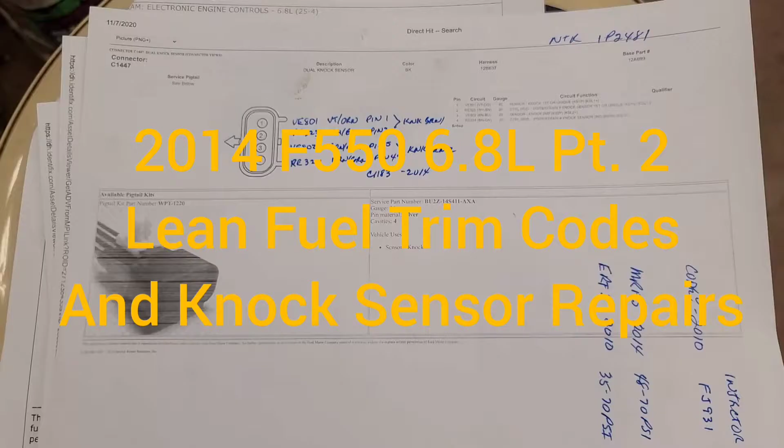So we're back working on this 2014 F550, and here was my plan. I attempted to locate this connector here, this WPT1220. It's available from Ford, but it's 2 to 3 weeks away, so I've ordered it from an alternate supplier, in this case Rock Auto, and it's going to be here quicker, and it's a few dollars cheaper. The price is not the issue, it's the time.

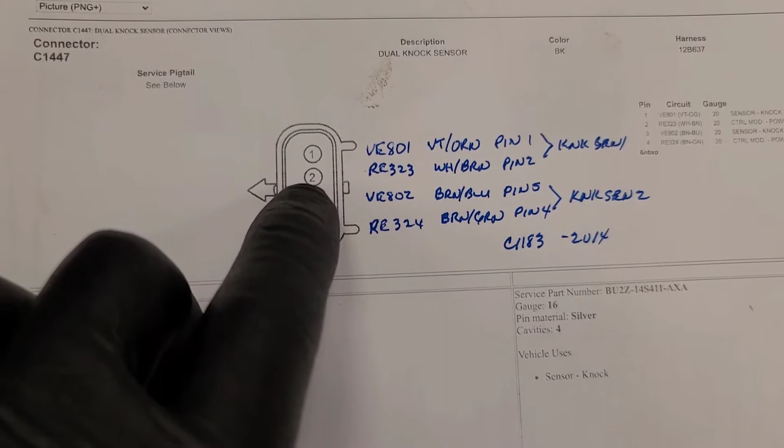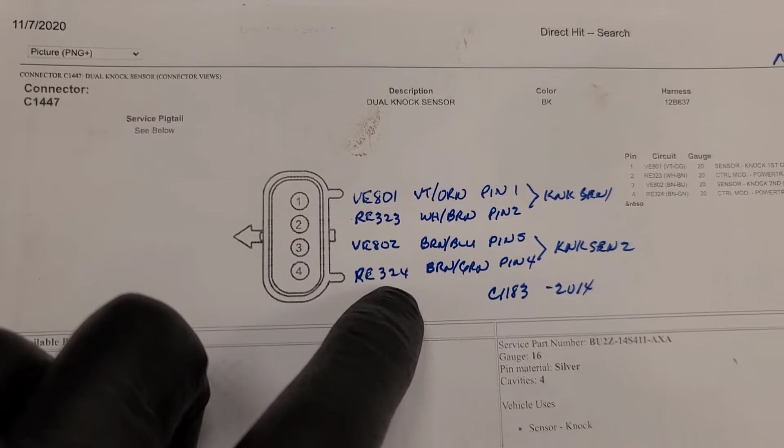But in the meantime, I'm going to put 4 male terminals on the wires and insert them into the appropriate pins. These are the pin numbers. 1 and 2 come from knock sensor 1, and 3 and 4 go to knock sensor 2. And I imagine they're polarity sensitive, but I'm not 100% certain because the knock sensor produces an AC signal, so it may not be polarity sensitive, but we're going to try to maintain the polarity.

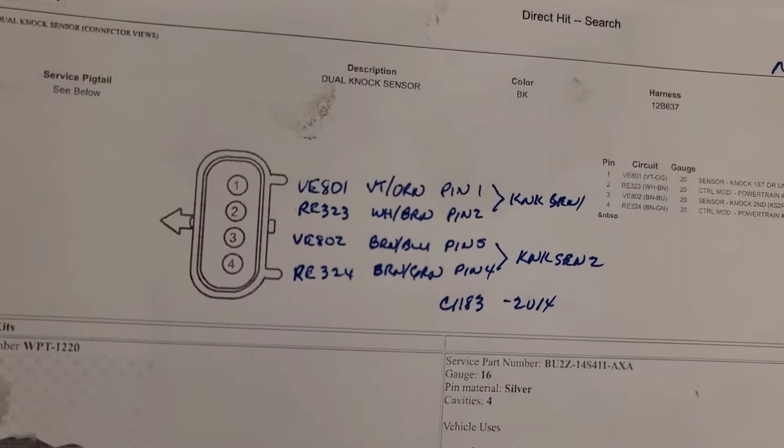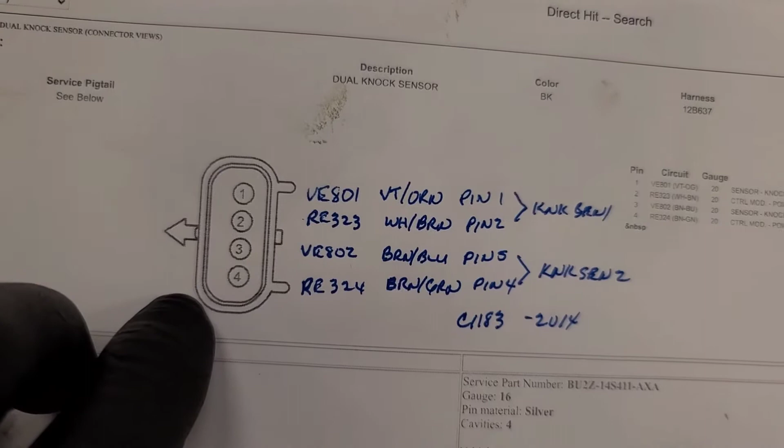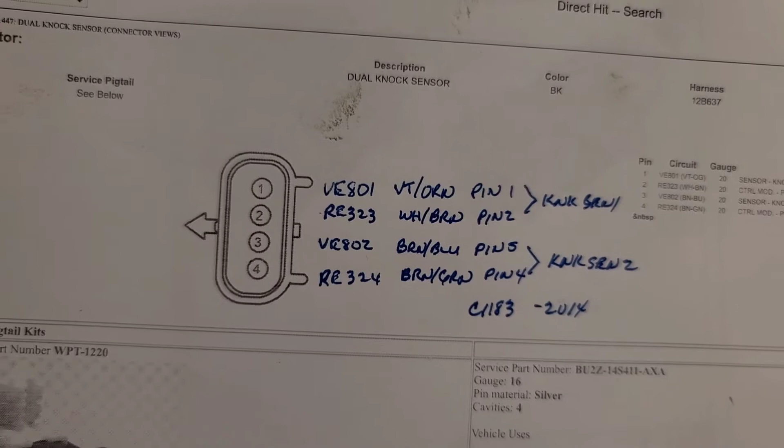We're using these 4 pins on the 2014 harness, and adapting it to these 4 pins on the 2010 harness. We're going to just make a temporary repair for now and tie up the wires so that they don't fall out, and then when I get the connector I'll make a more permanent repair. And then we're going to address the reason why it's running lean on both banks.

So that gives you an idea where that connector is. You can see the wires going down behind the intake manifold. I had to work by feel to put the 4 individual wires into the 4 female terminals in the connector on the knock sensor, the dual knock sensor.

Now I'm going to take this fuel rail line off. Notice the sketchy haywire and the hose clamp on there. I suspect there's no garter spring inside that quick connector, and that's why somebody haywired it on like that. But I have to take that off to put a fuel pressure gauge T in there. So we're going to do that and see what's going on.

So this is the fitting that needs to be put in series in the line. I took the haywire off and this line just pulled straight off. The garter spring is in there, but it wasn't holding at all, so I'm not sure what's going on with that, but we'll put some dielectric grease on there and see if this holds. I noticed this rib isn't very tall on the existing fuel rail, so I don't know, we'll see.

So I had to put a couple of tie wraps on that pressure fitting because the flare on the end of that pipe is too small for that garter spring to grab it. I don't know why, but if we end up doing injectors on this, I'll deal with that at that time. So I got the fuel pressure gauge installed. We're gonna check it for leaks and then fire it up, and got the scanner on. We'll have a look at the fuel trims and see what the fuel pressure is doing.

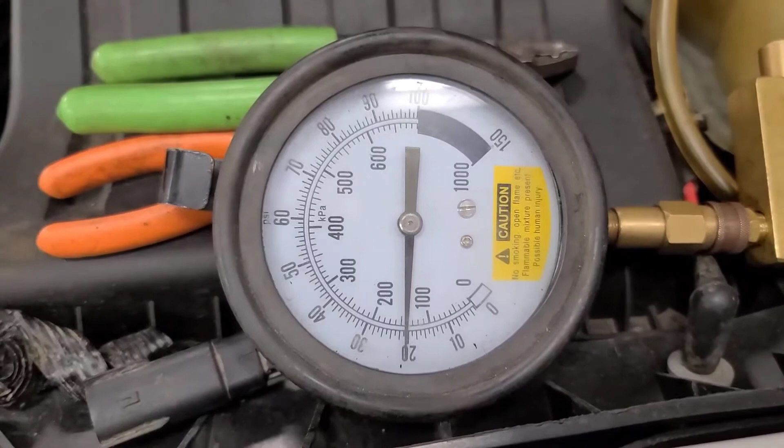Well, that would probably account for the running lean condition. No matter what spec I use for the 2010 or 2014, 20 pounds wasn't the spec. It's 30 or 40, 35 to 70 or 40 to 70, depending on what information I look at. Better see if this thing's got a fuel filter on it, but I don't think it does.

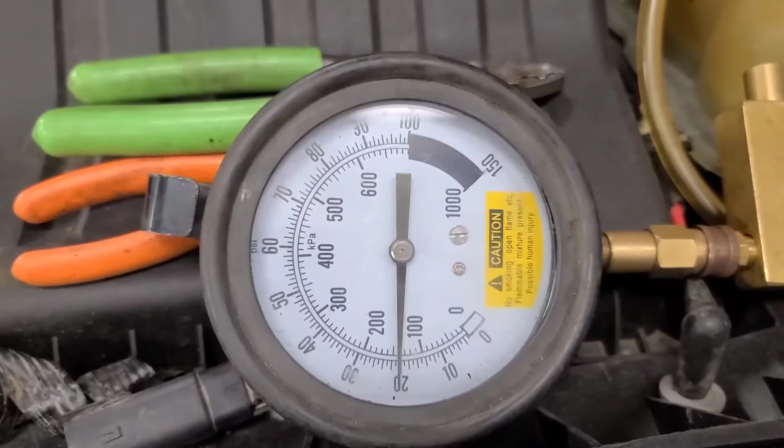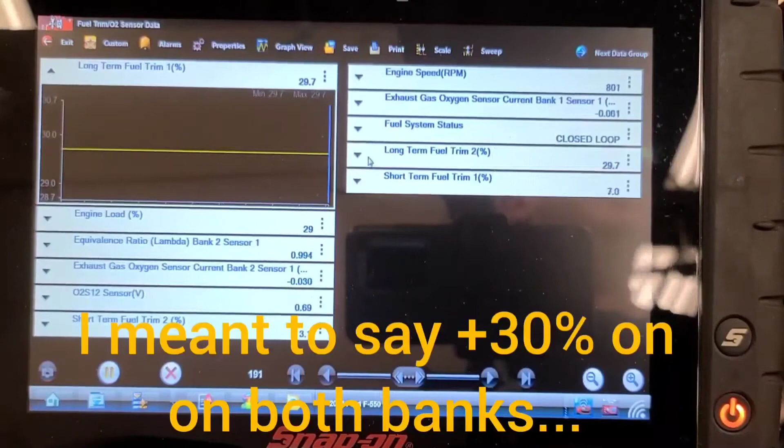So you can see it's running in closed loop, and the long-term fuel trim is +30 on this bank, and long-term fuel trim is +30 on this bank. So it's reached the limit of additional fuel, probably 30%, and that's why it's setting the P0171, P0174 code. I think that's what it was. Yeah, 171, 174, plus the 2 knock sensor codes, but those are in history now.

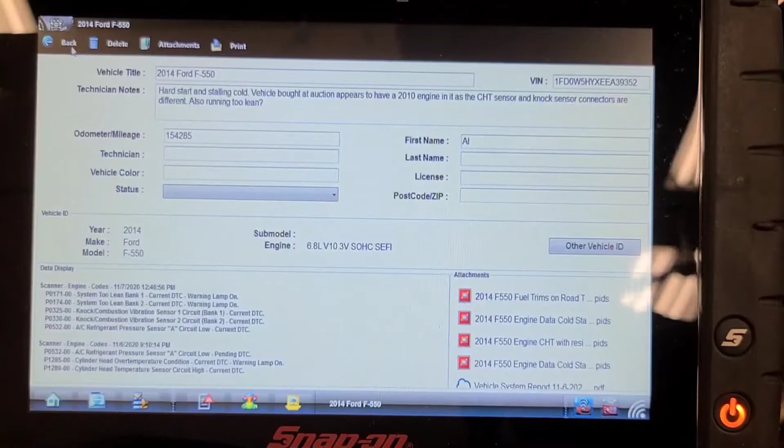Well, definitely low fuel pressure will cause that. I don't think it's a fuel filter. In fact, I don't think this thing has one, but I'm going to have a look and see. Maybe the fuel pump's been changed at one time and the wrong one was put in. This is a mechanical returnless system, so who knows what kind of hocus pocus has happened to this truck. It came from an auction in Alberta, and the customer has no clue as to what's been done. And we already know that it's got a 2010 vintage engine in the 2014 truck. So we'll have a look at the fuel delivery system now.

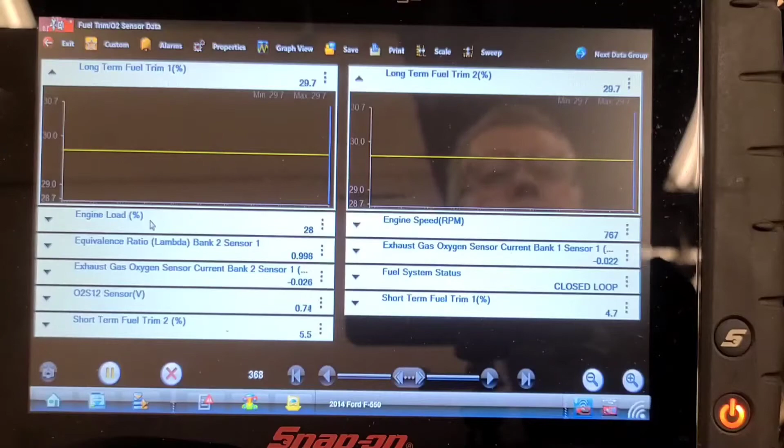So I had a look underneath this vehicle, and there is no fuel filter in the line. The fuel tank is mounted at the very back of the truck because it's a cab and chassis with a flat deck on it. Too bad it doesn't have a dump deck. That would have made it easier to access the fuel pump. Mind you, it is at the back. So here's my thought process. I'm going to run it on an alternative source of fuel and raise the fuel pressure.

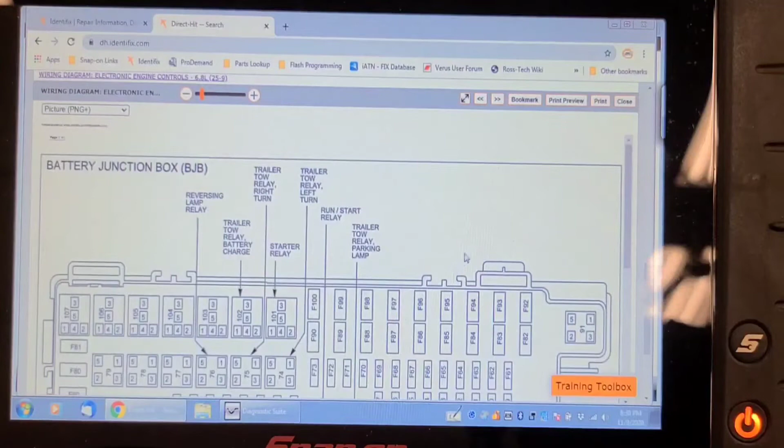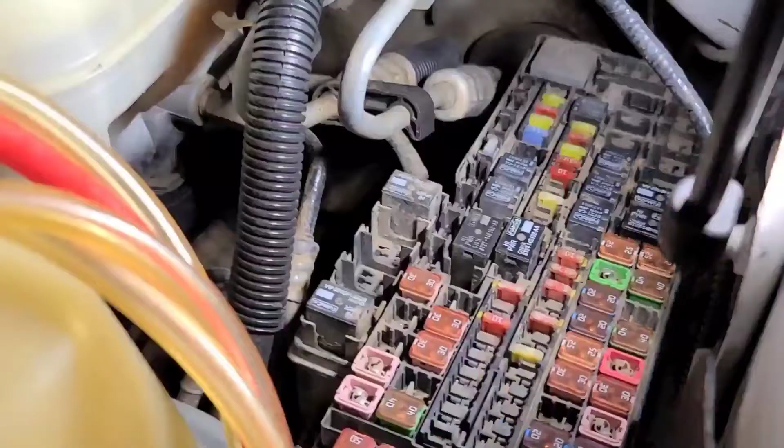So I had to find the fuel pump relay. It's item number 57 in the battery junction box. So we should be able to see that here. 57 is right beside these two fuses. So unfortunately this battery junction box is back here. This is the fuel pump relay right here from what I can tell.

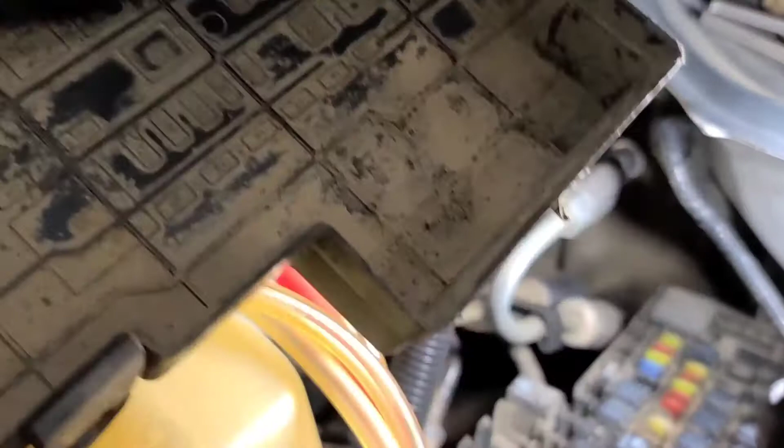57. Here is the underhood inconvenience center. And this is the corner 57 right there, right by my thumb. Look how dirty it is under that cover. This truck's been well used. So we're going to pull that relay out.

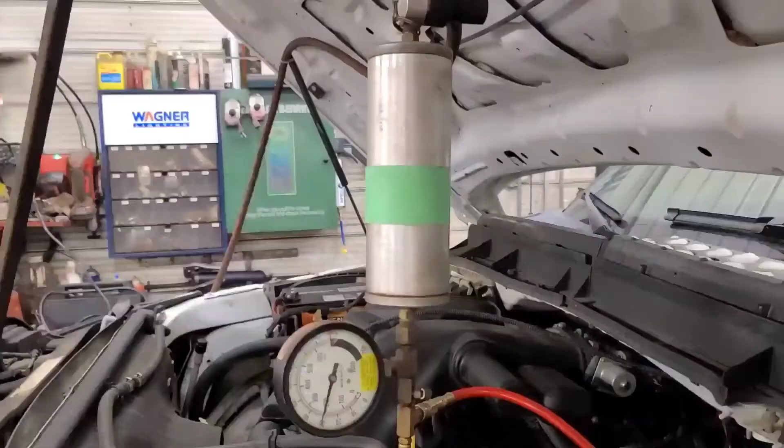That should disable the fuel pump, and we're going to connect an alternative source of fuel from a flushing machine. So here's my setup. It's an OTC injector flushing tool. The part number is there if you could read it. 7448.

Basically it uses shop air pressure and a pressure regulator to supply fuel to the fuel rail. You're supposed to use a cleaning agent, but I've got straight gasoline in there. And I've got it dialed up to 30 pounds, and I've got the fuel pump relay removed, so the fuel pump is disabled, and we're going to run it on this and see how the fuel trims act.

Well, that didn't work as planned. Truck wouldn't start. So I come back here and look at this, and I assumed that this just fed the fuel pump, but that fuel pump relay also sends a feedback into the powertrain control module for injector power, because I got no noid light flashing and no injector pulse. So pulling that fuel pump relay is not going to work.

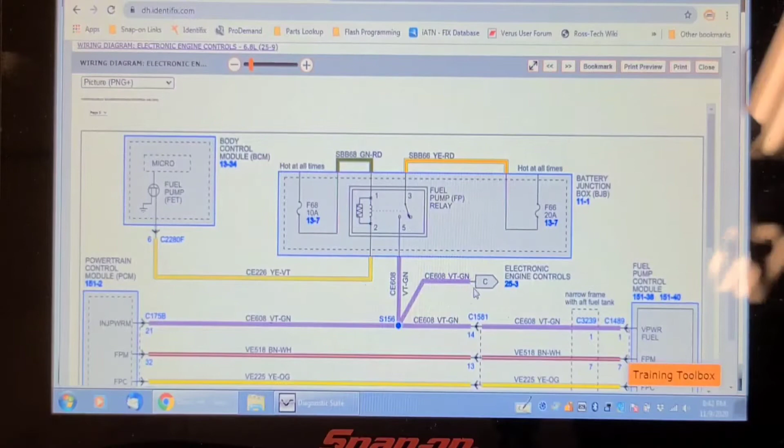Here is the circuit that goes to the fuel pump right here. It goes through connector 1581, and then to the fuel pump at the back. There's no separate fuse that you can remove. So unless we can disconnect this connector 1581, where is that connector? What does it look like first of all? Oh, that's a big mother connector. Oh my gosh. Let's see where it is. Because probably other things go through that connector that we need.

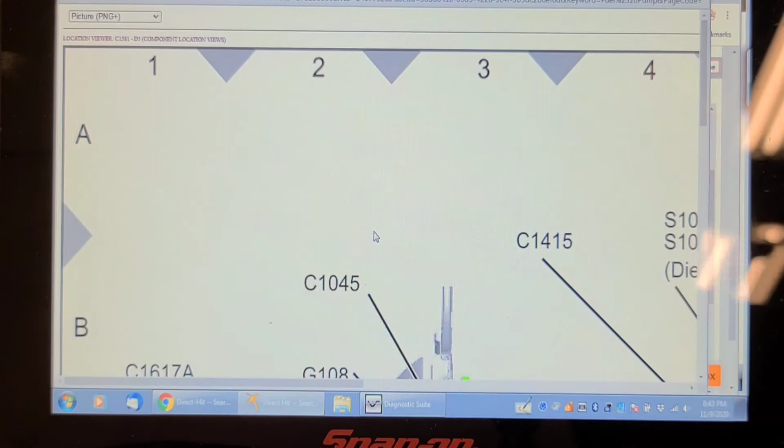So unless I can reach up on top of the tank and disconnect the fuel pump, I got no way to easily disable it. Well, what does it matter if it runs? I'm going to jack up the fuel pressure with another supply, so that shouldn't matter. It's not like I want to try to run it on an alternative source. Doesn't matter. Where is 1581? Yeah. So it's, oh, that's that connector there. Well, I wonder what else is in that connector. Maybe we'll have a quick look.

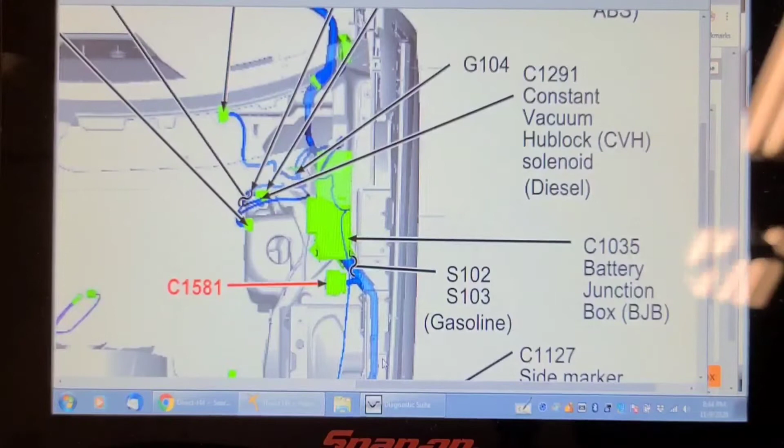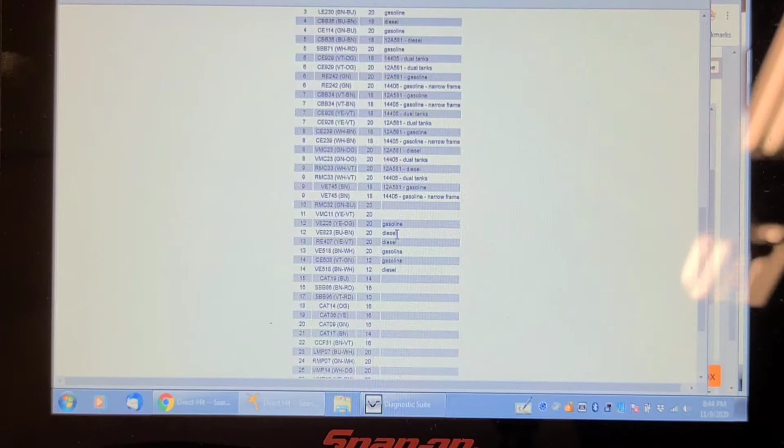So this is just like Ford. They give you a connector view and the connector location, but when you look at the pinouts, it doesn't say what the pinout circuits are for. You have to know the circuit numbers. They don't give you a circuit description. They just give you a circuit number, the gauge of the wire. Now, I could assume that that's for everything in the back of the truck, like tail lights and stuff. I think I'm going to see if I can find that connector and just unplug it and see what happens.

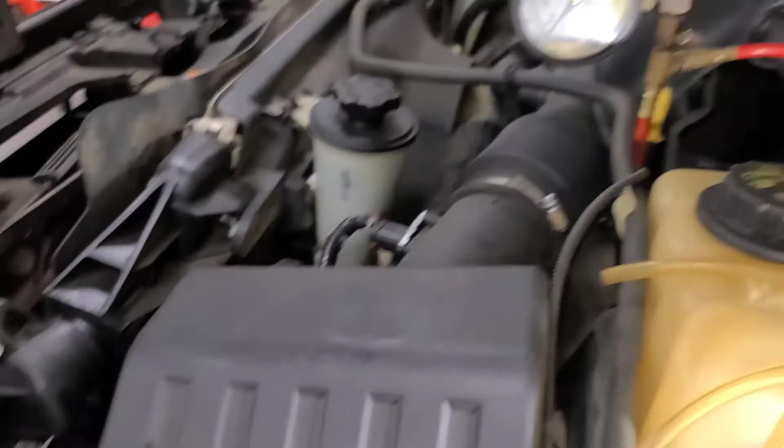That's 1581 down there, but I decided to just put the fuel pump relay back in. Now that I've got fuel pressure on there, I don't even have this turned on. I've got about 32 pounds of fuel pressure, but it was running at 20 earlier. That's strange. Why is it now 32? Let's see what the fuel trims do now.

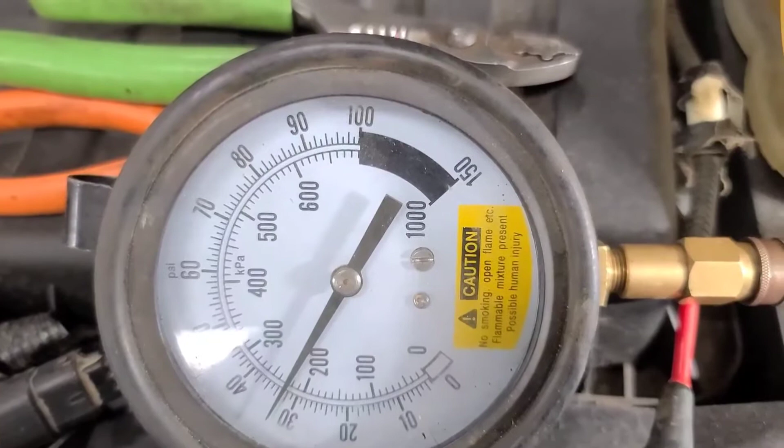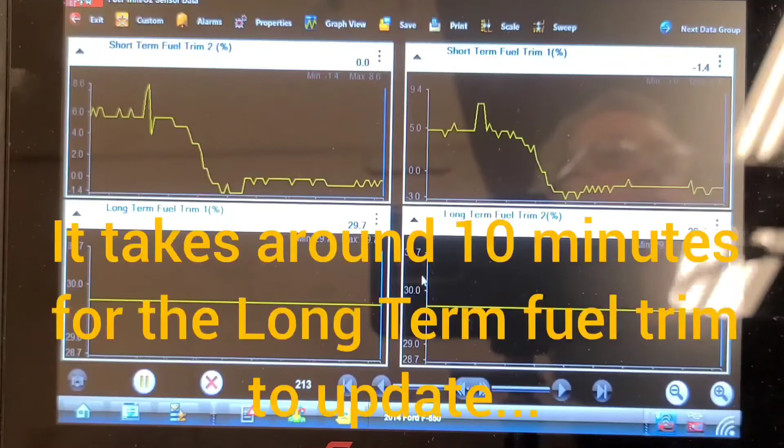So it's in closed loop. The long-term fuel trim and short-term fuel trim are still running pretty positive. So we're going to let it run for a few minutes and see if the fuel pressure will drop. Well, the fuel pressure went down. I jacked the fuel pressure up using the remote supply to about 41 psi right now. Let's let it run for a few minutes and see if that brings the fuel trims back into spec.

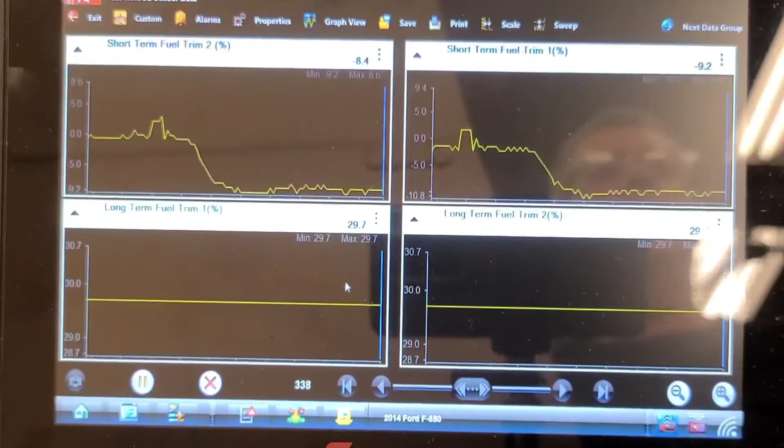So you can see what happened when I jacked it up to 45 psi. Now the short-term numbers are going negative, and it'll take about 10 minutes or so, and the long-term numbers will start to go negative as well. Again, we're going to let it run like this for a few minutes.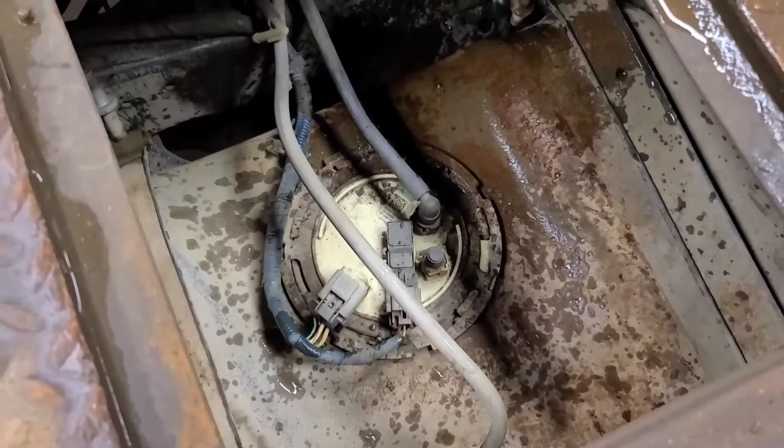So I was at the back of the truck looking at this fuel tank thinking that's going to be fun to drop that. And I'm thinking it's got a flat deck on it. It's too bad it didn't have a hole in the deck. Then I look up closer and lo and behold, look what somebody did when they built this deck. Imagine that. Something's got to go good today.

So although the short-term numbers are running lower, the long-term is not coming down. So I'm going to reset the keep alive memory. Got to do a key on, engine off. So I reset the keep alive memory so that erases the short-term and long-term tables of learned values. I'm going to start it now and run it.

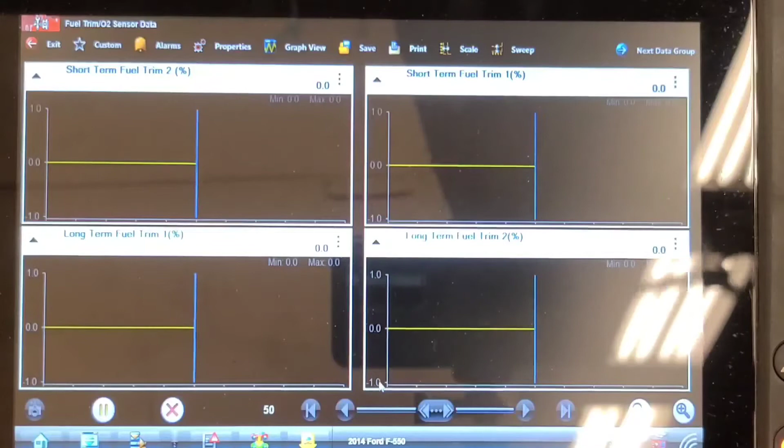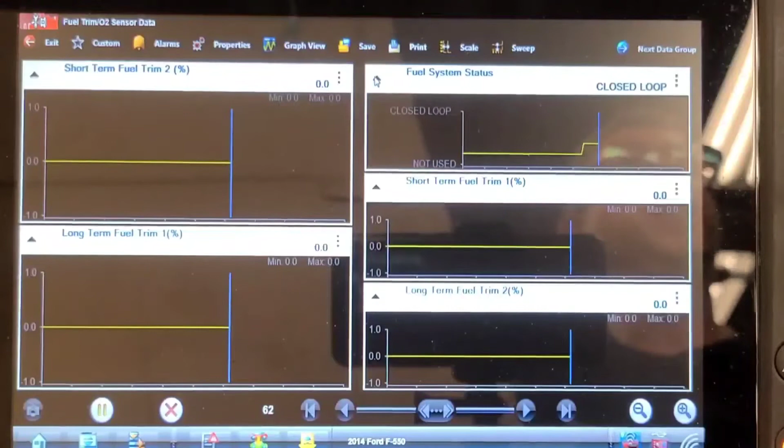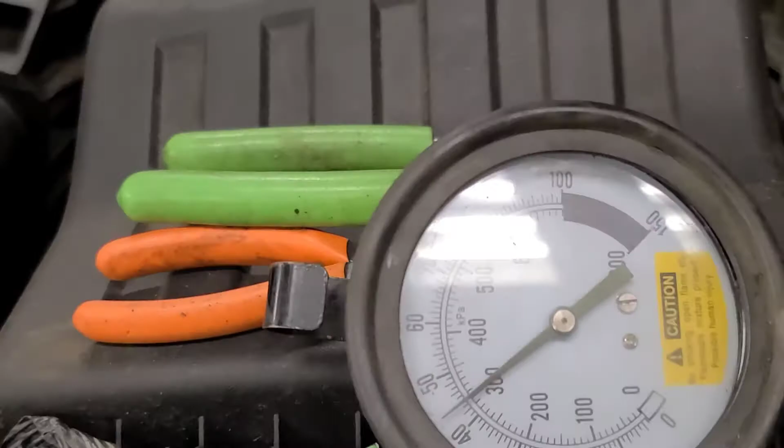I'm sure it's not in closed loop yet. See, it's in open loop still. Now it's gone to closed loop. Let's see what the fuel trim numbers do now. I've got it set at about 45 psi. That says 45.

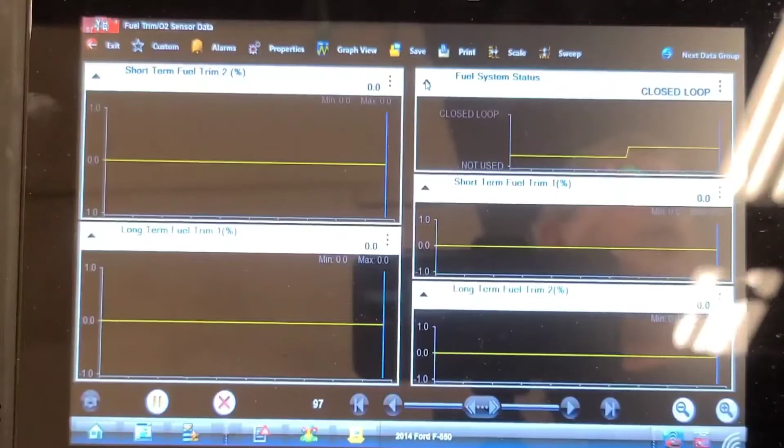So I think we're going to call the fuel pump based on this. Because if we had 40 to 45 psi fuel pressure, I'm sure it's going to run a lot better. Next, to figure out how to fix that fuel line. Well, it just started doing that. The short-term fuel trim spiked up to 20% on both banks, and the long-term numbers are creeping back up again. Yet it's running at about 44 psi. Is it possible we need 50?

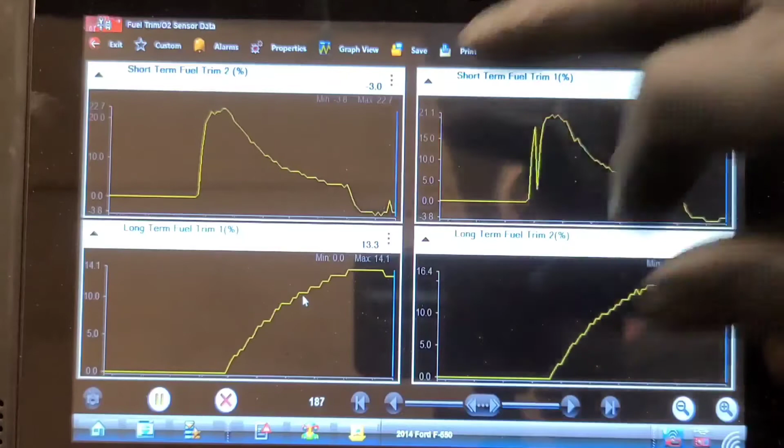So I turned the fuel pressure up to 50 pounds now. You can see the short-term numbers are going down now. Negative 3.8, negative 3.8. And the long-term numbers are coming down. So this thing needs about 50 to 55 pounds of fuel pressure.

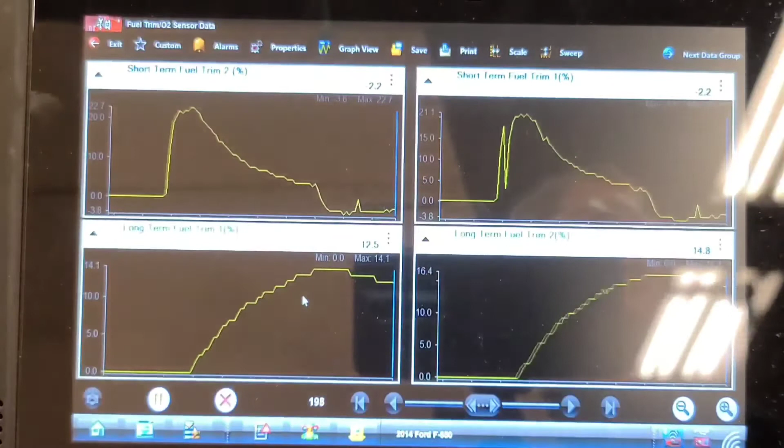Let's have a look at the spec from the Ford manufacturer. So here's what I found: 51 to 62. So if we set it to 55, which is where it is right now, I believe. Let's see how it's running now. Long-term numbers are coming down. Let's go look at the fuel pressure. It was about 52. I just turned it up to 55.

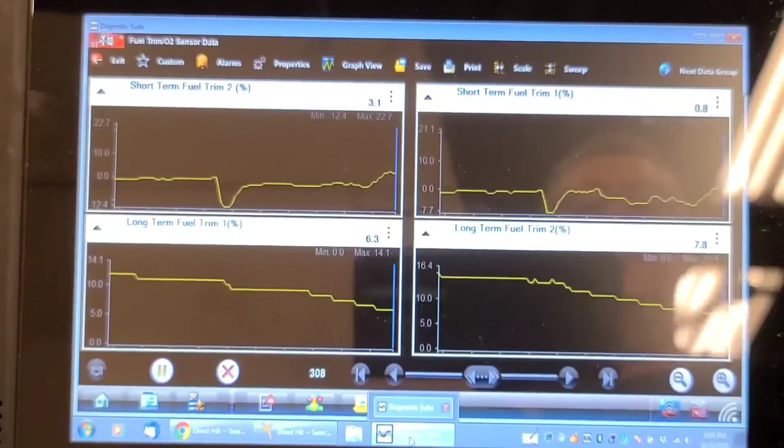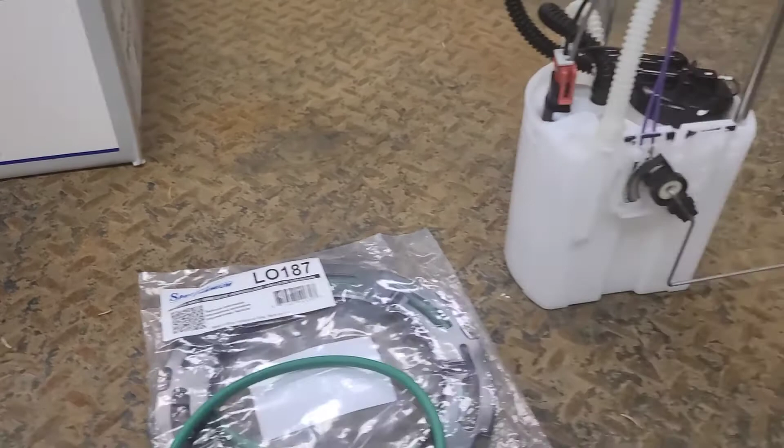So we're going to pull the fuel pump on this thing. Of course, we're going to recheck it with the fuel pump in it and see what the fuel pressure is. So here's the new fuel pump that I determined was the right one for this vehicle. I kind of like the Delphi product. I've had good luck with them. There's the new pump. I also have a new lock ring for it because the one on it is kind of rusty. So we're going to go ahead and install this pump in the tank and see how it performs.

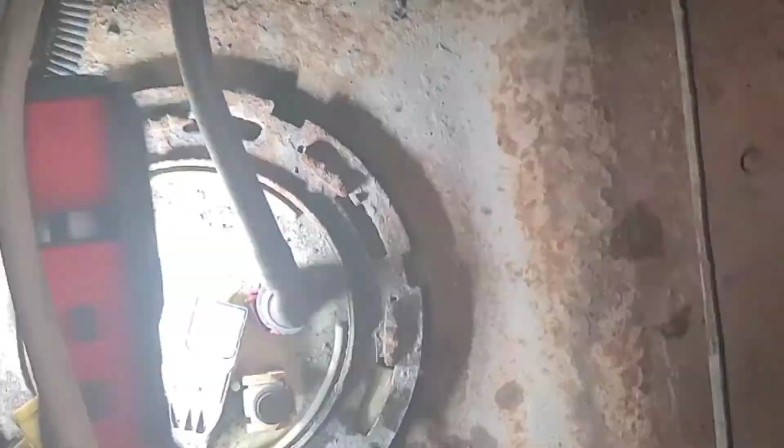So you can see somebody provided an access through the box of this, at the bed of this truck, which is making this significantly easier. Wait a second, what's going on over here? Look at these straps, just sitting here. Both sides. Oh boy. Who knows what's been going on with this truck? I would imagine it's been worked on significantly. Well, we have to unplug these fuel lines and blow this all off. And then we can take the lock ring off. I'm going to use an air chisel.

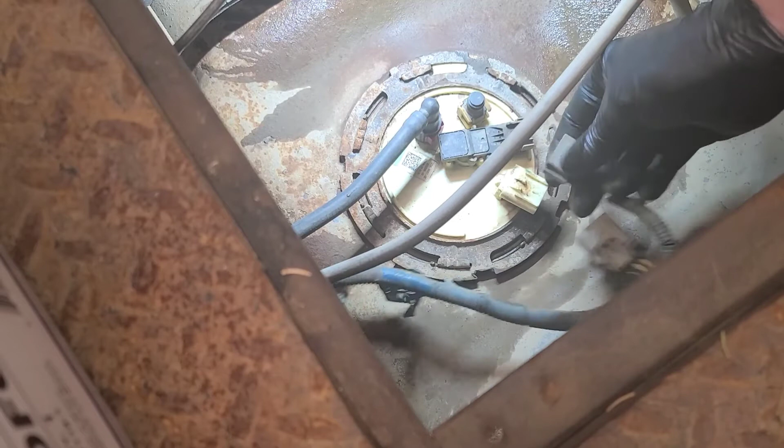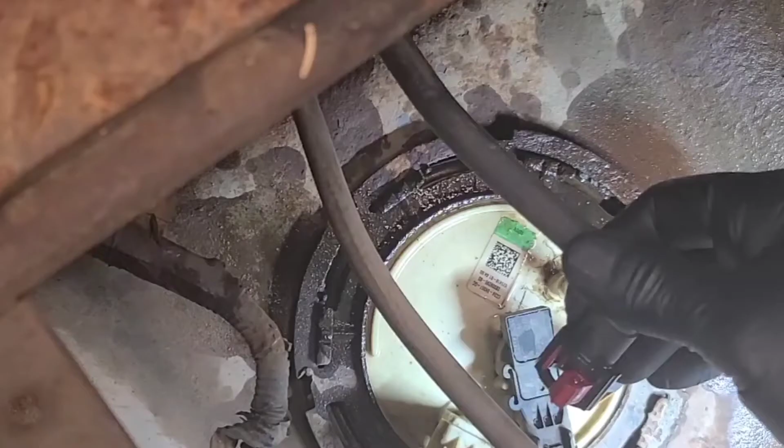So disconnect the two connectors, little release locks on them. You have to press them down, and they're full of sand, so they're a little difficult to get off. Now we've got to figure out how this fuel line quick connector comes off. I think you just depress it. Yeah, I think you just depress it and blow the top of the tank. So pry open that little lock retainer and then push it across to the other side so you can pull it off. This thing had been sitting all night in the shop, so it had already relieved any significant fuel system pressure.

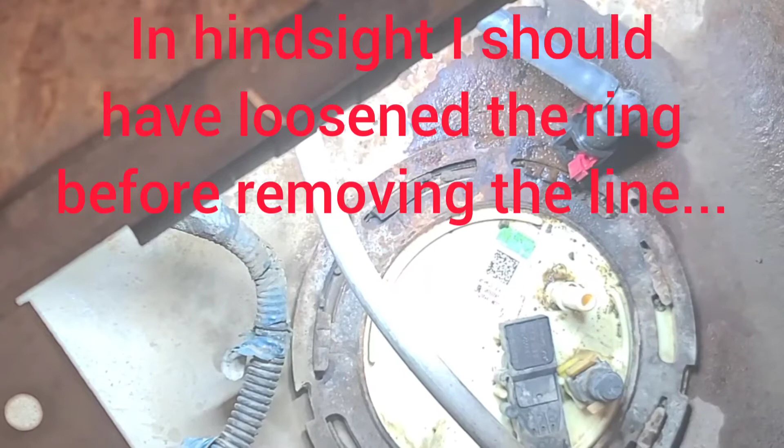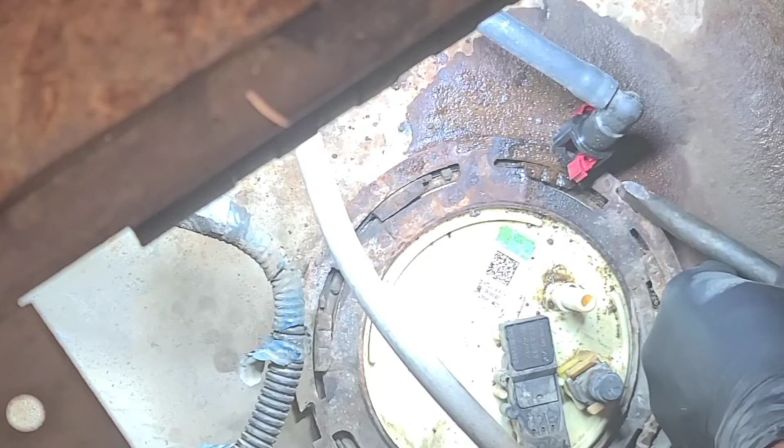Now we're ready to take the lock ring off. I like to use an air chisel because it's really going to be difficult to swing a hammer in here. I'm going to see if I can get at this. And you want to be careful not to create any sparks here. So this is pretty challenging to get in here, even though it's accessible. Using the air chisel to tap this ring off. There. Now you've got it out of the way. Before you remove it, blow the dirt and sand off that has loosened.

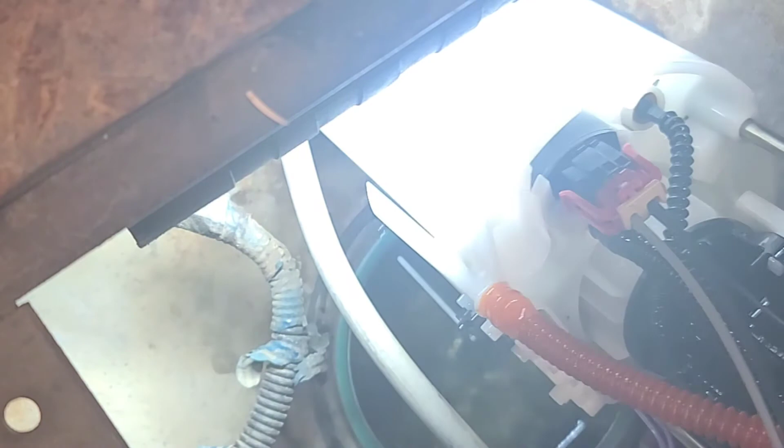Alright, now we're ready to pull that out of the way. Pull the fuel pump out. And set it off to the side here. We want to look in the bottom of the tank and see if there's any sand in here. It looks relatively clean. Well, there's a little bit down there. Yeah, there is a little bit of sand in there. I don't know if you're going to be able to see that. Yeah, you can see the sand in there.

I'm going to use the suction machine for that, see if I can get it out. Oil extractor. So here's my plan. I'm going to use this oil extractor to create a vacuum and try and suck the sand off the bottom, that little patch of sand that's sitting there. If you leave it in there, it's going to tend to go into the new fuel pump and damage the new fuel pump. That's probably what damaged this one here. Pretty good. You can see a couple little bubbles of water laying there on the bottom. So watch what happens when I put the vacuum in there.

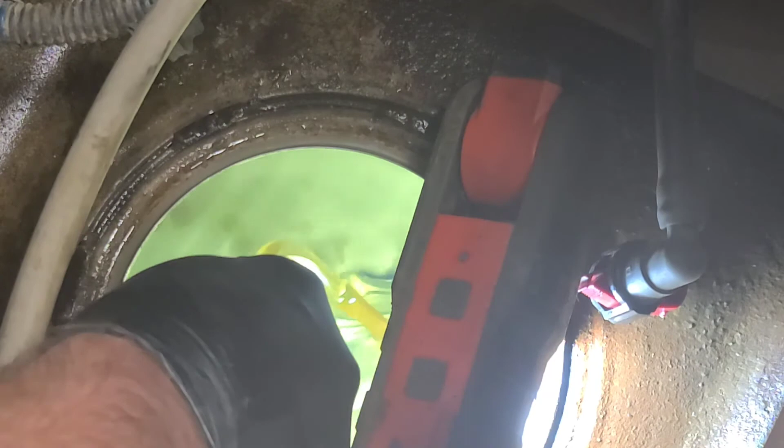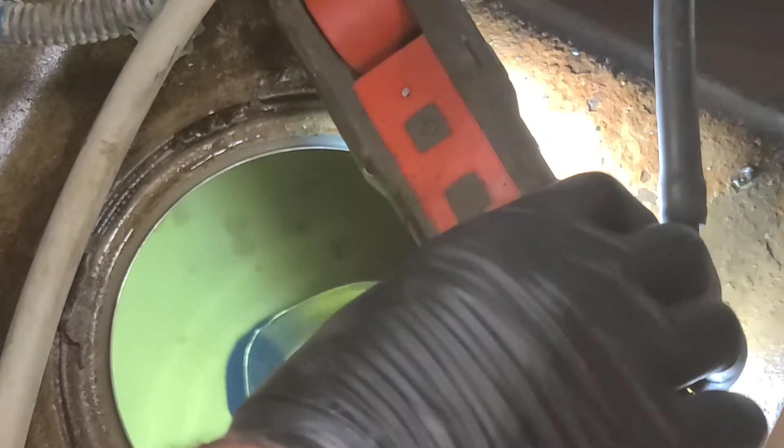Well, those are rust stains. Those are stain marks. Anyway, we got all the sand out. That's good. We only sacrificed about 2 liters of gasoline. Looks pretty good in there now. I thought those were water bubbles, but those are just stains on the bottom of the tank. So we'll clean up this O-ring seal area and put the new pump in. So I've set a magnetic parts bowl in there to keep sand out, without introducing any more sand into the tank. There, that's perfect.

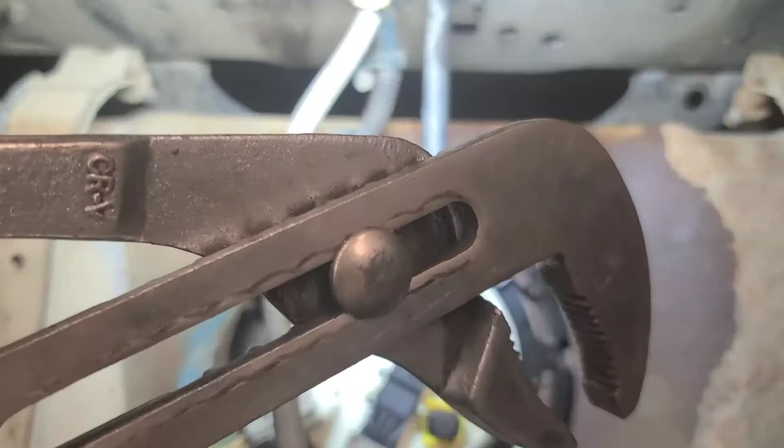We put some dielectric grease on the O-ring and put it back together. So there's the fuel pump reinstalled. I had to use a pair of channel locks to turn that lock ring the last 1/4 inch to get it into the ears here. Dielectric grease on the seals, dielectric grease on the connectors, blow all the sand out of them.

We're going to put a tie wrap here, and then we're going to bolt these fuel tank straps back down like they're supposed to be. That tank is just sitting in there. There's several gallons of gas in there, so I can't lift it. So let's see what we got for fuel pressure now with the key on.

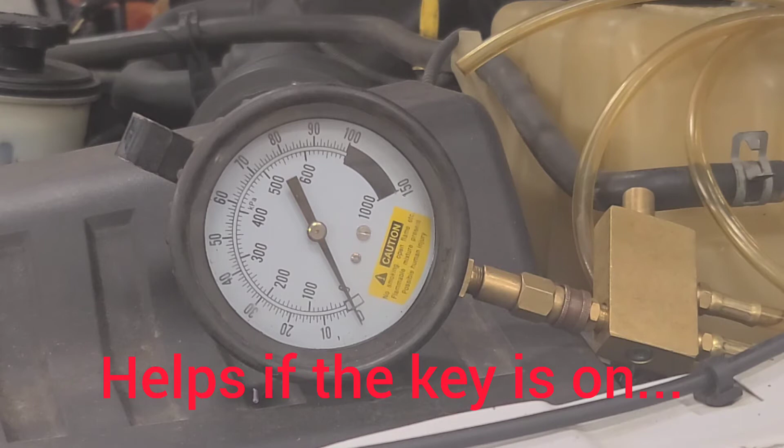That's not very impressive. Let's try this. That's a little better. Like I thought, 55 psi, 57 psi. So we'll have a look at the fuel trims now and button up that tank.

So if you recall, that fuel line wouldn't stay on the fuel rail. So I stole the garter spring out of this fuel line fitting that I had from my test kit. This is the replacement one. This is the service fitting that they use now for checking fuel pressure, and this used to be it. You can see it's significantly longer. And the reason why they stopped using this long one is because there's not enough room in the vehicle.

So I stole this garter spring out of this service port fitting and put it in there, and it seems to be holding just fine. It's got the secondary lock on it. I'll show you what I mean by that. So it has the secondary lock. I did change this screw clamp to a fuel injection clamp, but this secondary lock holds it on just the same, just in case that doesn't hold. But it seems to be good now. Now we're going to run it and see if the fuel trims are normal.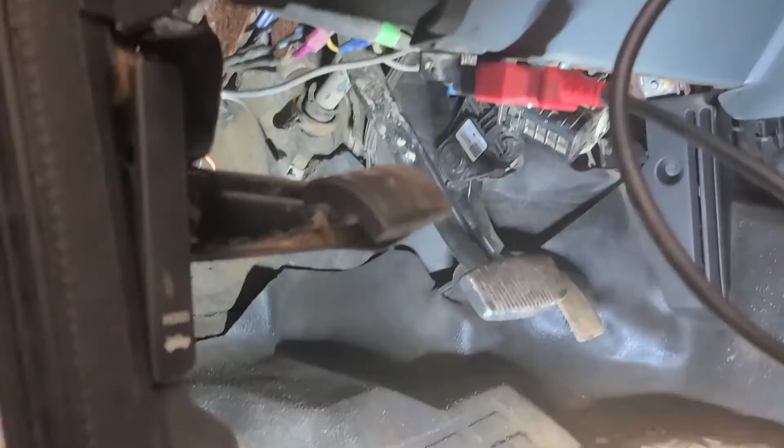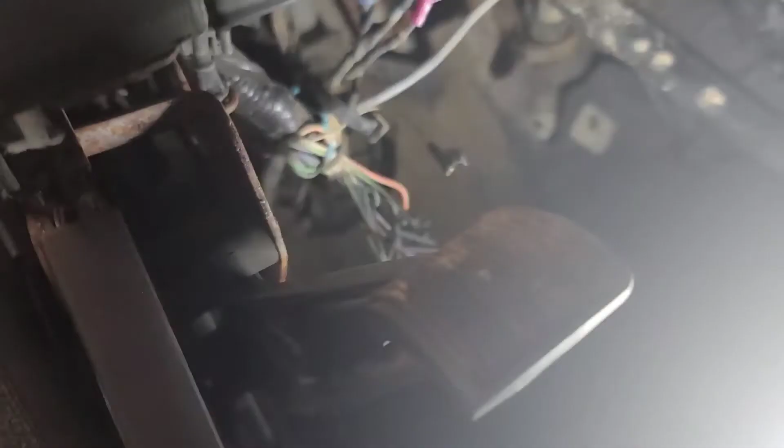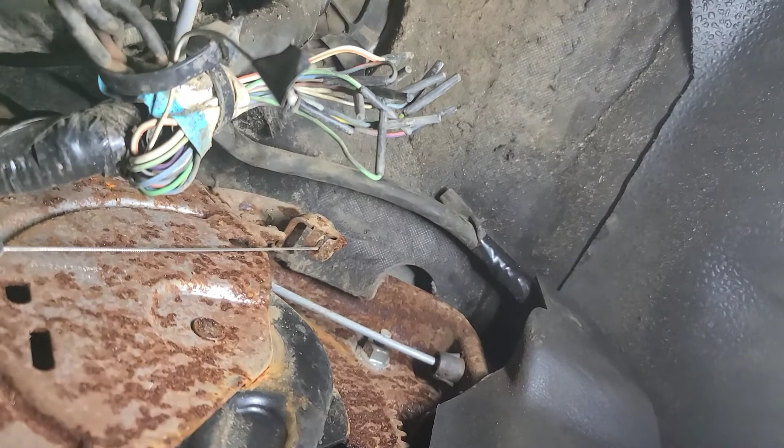So I noticed the DLC connector was just hanging here, so I decided to screw it back to the dash. And then I look up underneath the dash here at the brackets and stuff in here, and there's a lot of rust. Look at the rust on that cross brace. Harness hanging down, connector hanging down. Look at the rust on the bracket for the emergency brake pedal. I wonder if this vehicle was a flood victim and has been rebuilt. That would explain all this hocus pocus.

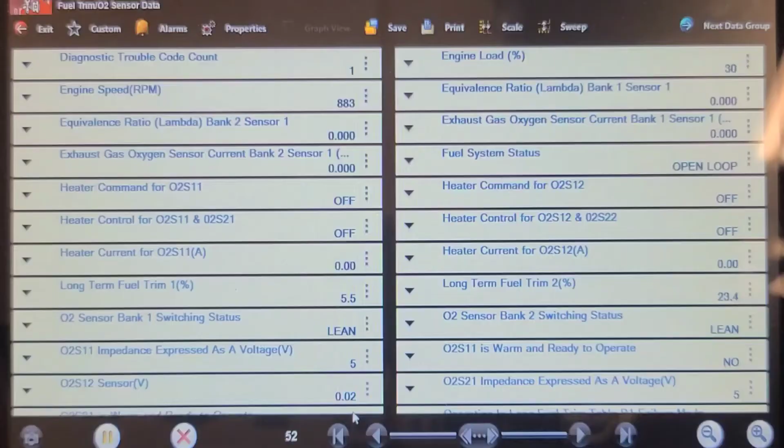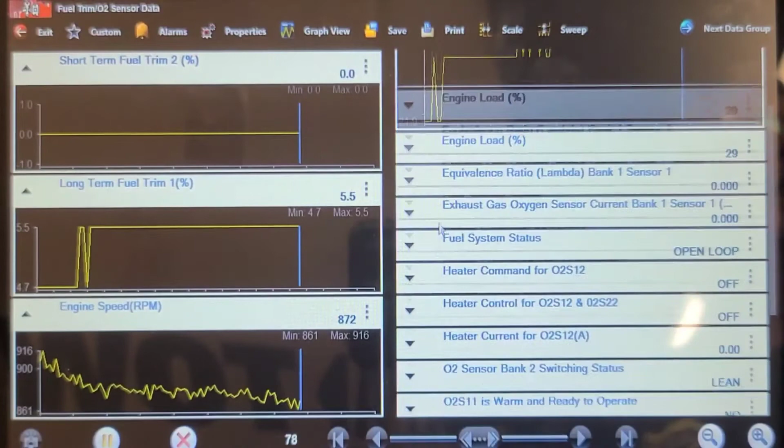So we just started it up, looking at engine speed. Let's look at the short-term and long-term fuel trims. Long-term fuel trims coming down. No, that's RPM coming down. I didn't reset the keep alive memory, but it hasn't run long enough to update it anyways. There's short-term, long-term, and short-term. Long-term fuel trim on this bank is at 5.5%, and on this bank it's at 24%.

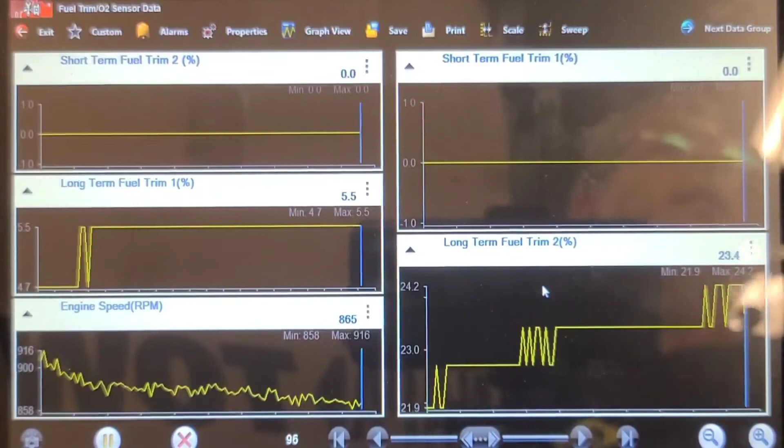Okay, so we're going to reset the keep alive memory. Okay, so we've got the keep alive memory reset. You can see the long-term and short-term fuel trim numbers are both at 0. Just started, it's in open loop, so we're going to let it run while I bolt down that plate on the back of the dash, and come back to this after a few minutes.

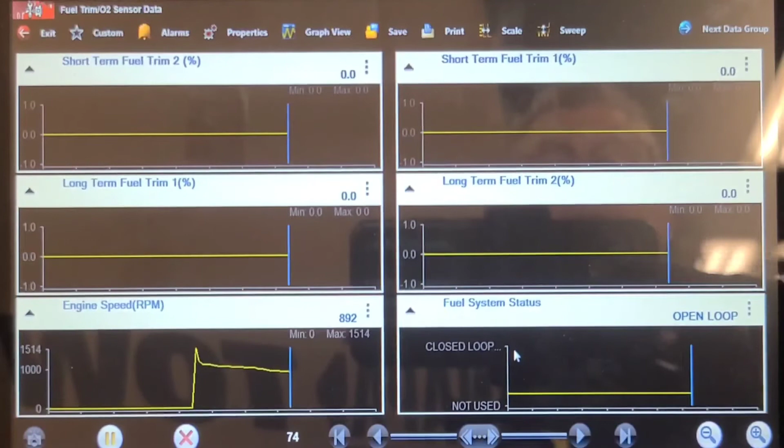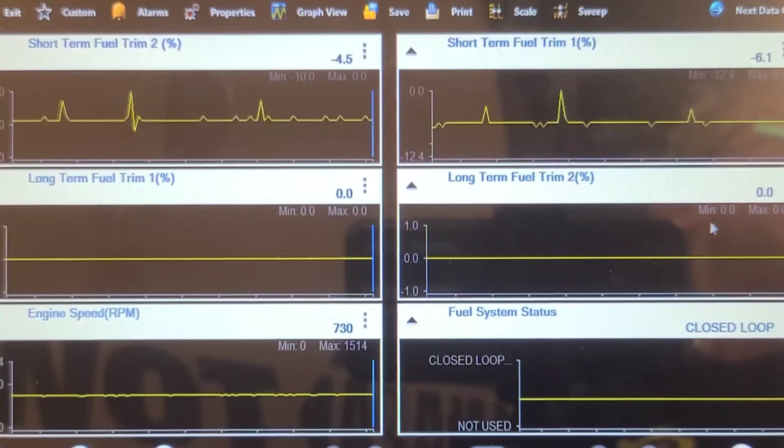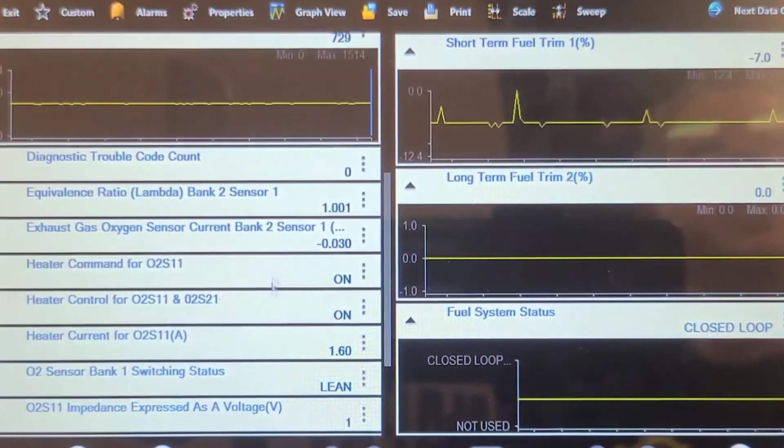There we have it. It's been running now for about 20 minutes. It's updated the fuel trims, at least at the idle block cell. It's running at 0% long-term fuel trim, and -7, -4. So it's in good control now, so we're going to take it for a road test. We still have to fix that connector to the NOx sensor. I got 4 individual wires in there. Should be good enough to go for a road test. Looking for the temperature, I don't see it in this data list. So we're going to take this for a road test.

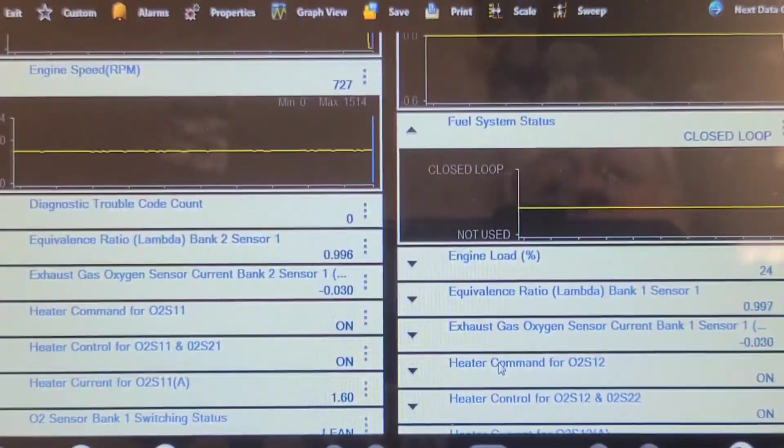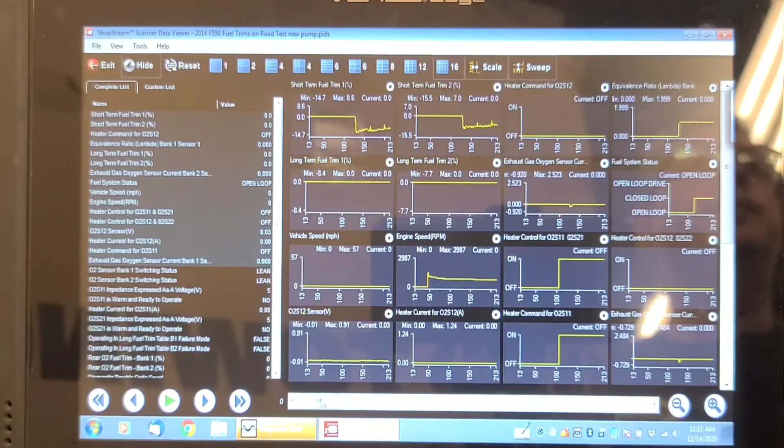So I took this truck for a road test down the highway, and it runs beautiful. Fuel trim stayed very well within range. Long term on the entire trip never went positive, -8.4 and -7.7. Short-term fuel trims, of course, are following the O2. Now, what I don't like is the rear oxygen sensor activity.

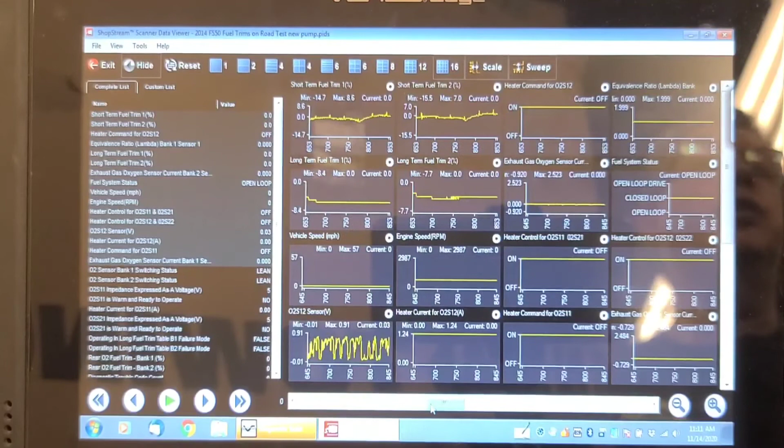Now, I understand he had a catalytic converter installed on this as part of the safety check, because apparently it was missing. But based on the rear O2 sensor activity, that catalyst isn't doing shit. You can see the activity in the rear O2, which would be after the cat, unless they put it in the wrong place. They mentioned something about having to drill and install a bung for the O2. Well, that's secondary. It runs good. Fuel trims are normal. Power is good. Starts good now. I have that NOx sensor wiring harness to repair.

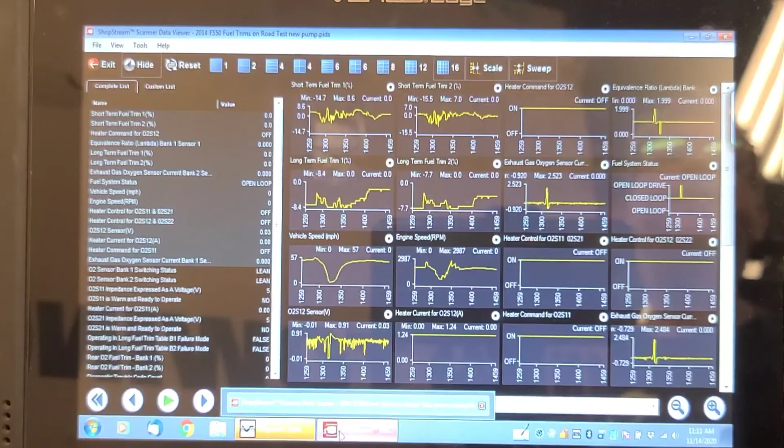But I scanned it for codes. Guess what? Catalyst efficiency pending code. Check engine light is not on now, but it's going to turn it on tomorrow when I road test it, or the next time it's driven. So there's something going on with that aftermarket catalyst, or the O2 sensor is not installed in the correct location. I'm going to talk to the customer. I've got other work to do today, so we're going to leave this for now because I'm still waiting for that connector.